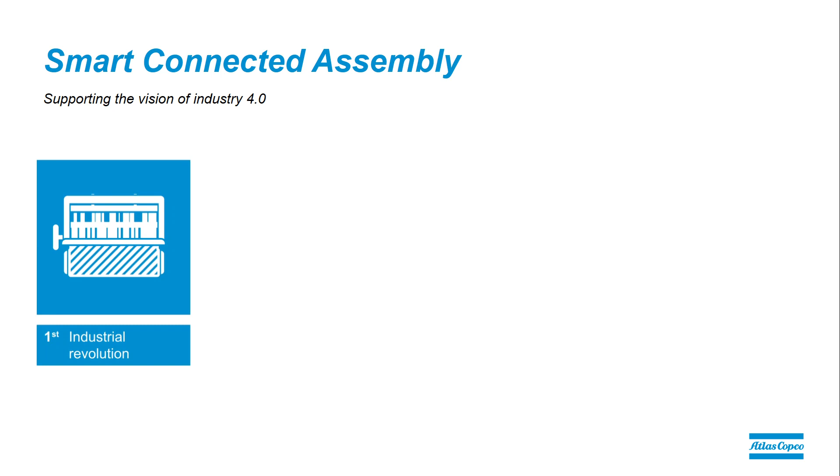Before we can go into any specific concepts, I think it's important to take a step back, because to understand where we are going, we need to understand where we are coming from. As many of you know, Industry 4.0 is a term representative of the fourth industrial revolution that has already begun, and we're seeing it now in its infancy stages. But how did we get here? How did we get to the fourth industrial revolution? Let's take a step back and look at the innovation through history that has been driving us to this point, starting with the very first industrial revolution that was marked by a shift from people making things as individuals inside their homes and in one-man shops to factories and mass production.

This utilized special purpose machinery powered by steam engines, and really enabled the second industrial revolution, which we're probably all most familiar with as we still live and breathe in assembly lines today. With this second industrial revolution came mass production, further enabled by the assembly line. The third industrial revolution took that assembly line and mass production and introduced electronics and IT to further automate production processes. This third industrial revolution is really where we've been since about the 1970s. And that brings us to our current state.

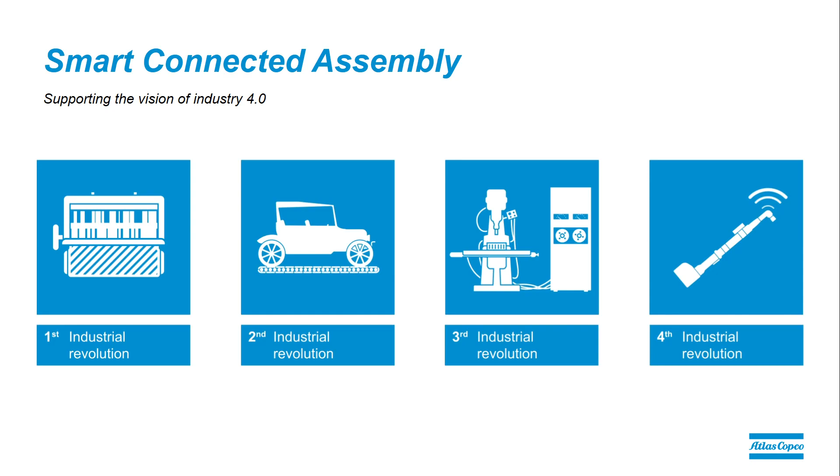When looking at smart or connected devices, Atlas Copco has more than a decade of experience delivering smart devices, and today we have more than 15,000 wireless tools in operation. With this, we have gained not only knowledge in how to design and produce smart devices with battery and wireless technology, but maybe even more important, we've gained the knowledge of what it takes to actually deploy this technology and get it up and running to meet our customers' production demands.

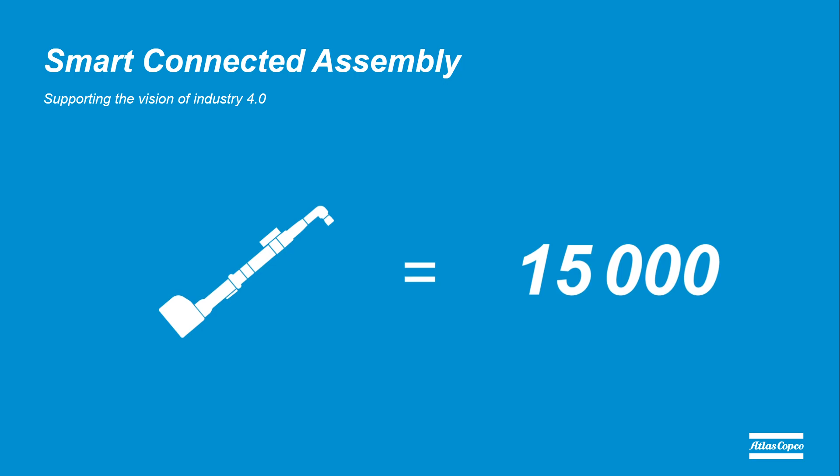Going one step further beyond connected devices and into the big data realm, we look at our 15 years of experience in data collection and analysis with over 60,000 connected devices, which has allowed us to gain insight not only in how to develop software for data collection with the right communication protocols, and then optimize the user interfaces, which is something we have done with our latest generation data collection software. This has also given us the knowledge to understand what it takes to maintain data over time with archiving and upgrades, and the analytical tools needed to really make sense of it all. So between our over 15,000 smart devices already in production today and our over 60,000 connected devices, we have a solid platform both in product and in knowledge base to stand on today, but also to build on for the future.

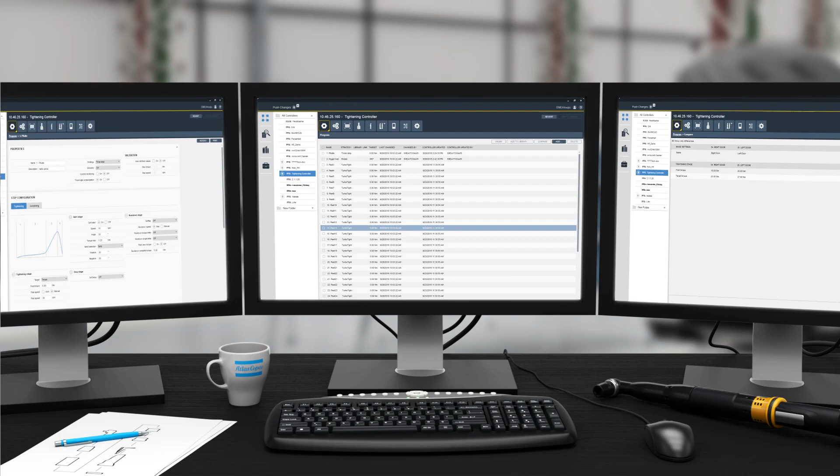From the configuration software now, let's go out to the plant floor level and take a look at this overview, where connectivity and real-time control of the assembly process is brought to life through our next generation tightening controller, the PowerFocus 6000.

This controller operates as a fog node, which essentially means that it allows for the connectivity and real-time control to happen closer to the physical proximity of the tightening.

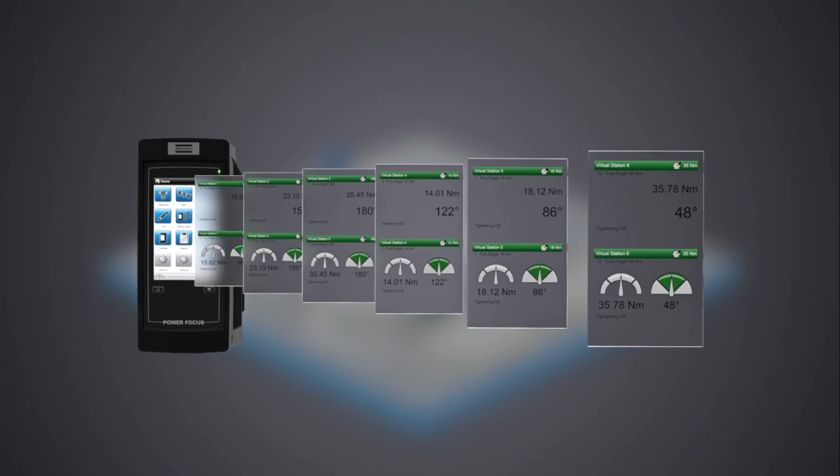In addition to that, this controller is capable of having multiple virtual stations. So instead of a hardware box running one-to-one tools throughout, a virtual station provides the necessary process control in the station. This concept of virtual station eliminates the need for hardware in each individual station. These new wireless stations can be added simply by adding new virtual stations onto existing control boxes.

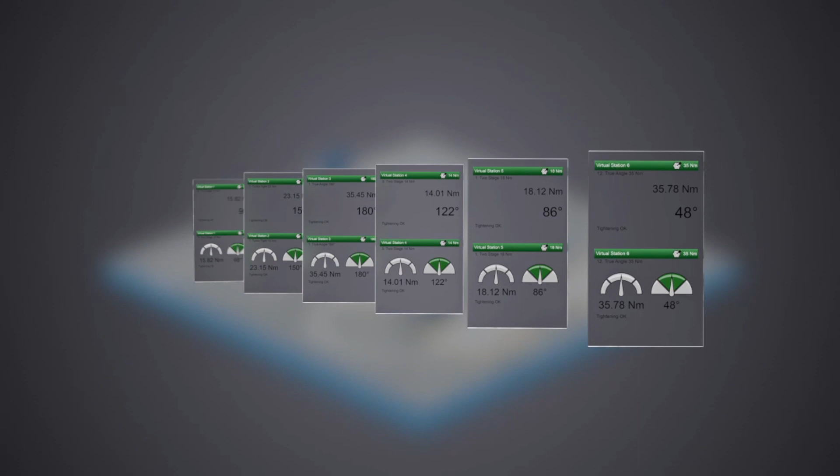What we're illustrating here is this virtual station concept now being brought down to the station. And when you show all the connectivity of the entire assembly line together, we see that we represent a change from value created by boxes and cables to now software and wireless smart devices, which is pivotal in supporting Industry 4.0 and is a cornerstone, like I said before, of our smart connected assembly.

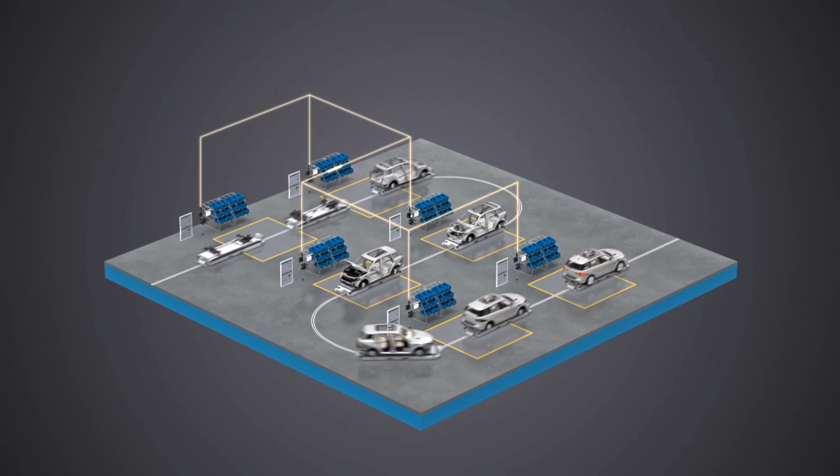What we're representing here with this graphic, you can see in the white lines going up from the stations and the lights moving around, it's symbolizing the data transfers that are happening. So the process control is happening at the individual virtual station level while the data is being pushed back up and being recorded at a traceable level.

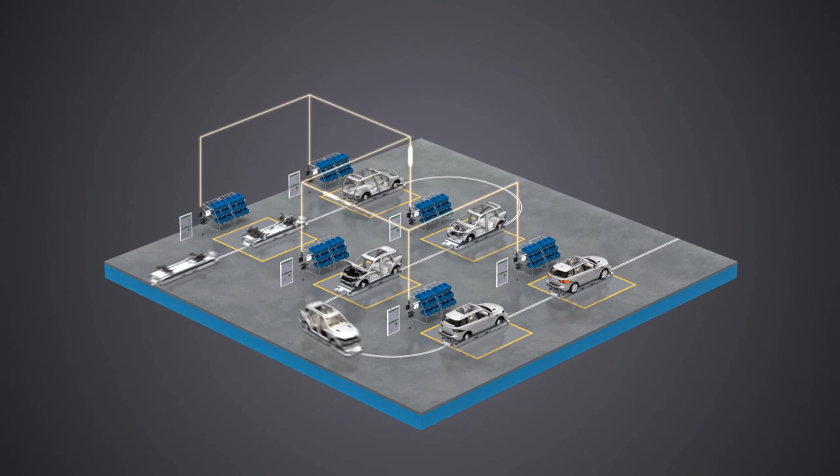Let's go now from the plant floor level that we were just at to a station view and explore how our products bring to life our 6 pillars of value.

Superior productivity has long been a value pillar of Atlas Copco. The PowerFocus 6000 is the latest generation of tightening controllers from Atlas Copco. With this new platform, we focus on various value pillars, but specific examples given here include new product introduction, reduction in energy, and human interaction.

With regards to new product introduction, the system's capability to add and move around virtual stations instead of physical boxes means faster, simpler, and less expensive rebalancing when our customers are introducing new products. And within that same regard comes...

Reduction in energy use. With the use of virtual stations, there's less energy used by the actual physical boxes consuming electrical energy. And then we move into human interaction.

The new interface on this controller has been designed really to assimilate to what most operators and users would be used to now with smartphones and tablets and things like that, to ease use and also make it more efficient as far as training and things of that nature go.

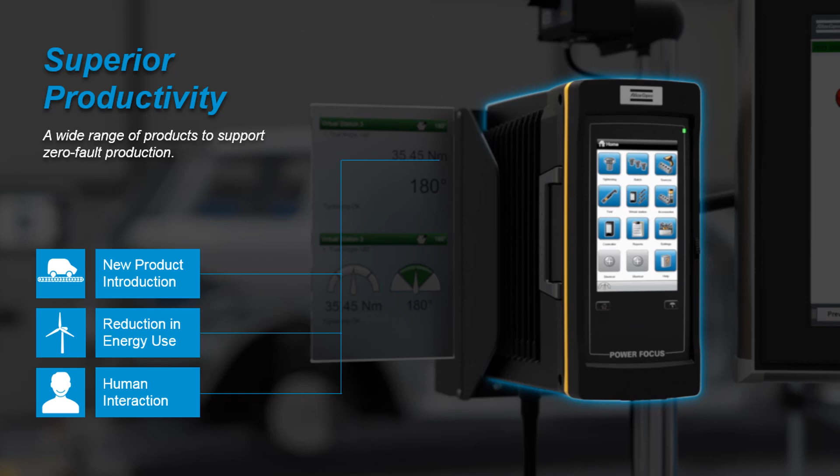Going now down to the tool level, we look at the Tensor STR series, which is our latest generation of corded transducerized tools. Some values that this tool is bringing now is with use of a physical sensor in the tool, we're able to introduce a new angle monitoring strategy called True Angle.

What this strategy is able to do is reduce common assembly problems by eliminating operator influence on the tightening and giving an actual true angle readout of what was applied to the joint specifically.

And if we look then now next to improve productivity, we've put a faster motor with better heat dissipation, which should reduce cycle times in most applications.

And then going into human interaction, another new strategy we've implemented with this tool is on the tightening side, and it's called Turbo Tight. What Turbo Tight does is it's an algorithm that is able to reduce reaction force and in some cases reduce the need for reaction arms altogether.

Other things that you see on the tool here is what we call an EHMI. Down at the bottom of the tool there towards the reverse ring, you see an indicator right there for the operator getting readout and feedback as to the results of the tightening. And then at the end of the tool are rotaction sockets, which are sleeved sockets to protect from injuries due to entanglement.

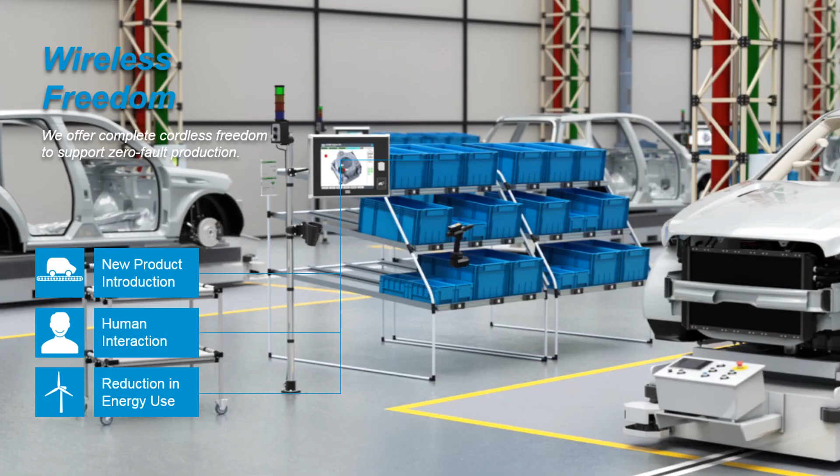Moving on to another technological trend, which is towards wireless devices, let's take a look at what we have to offer in this product range and talk about what values you can gain through wireless freedom.

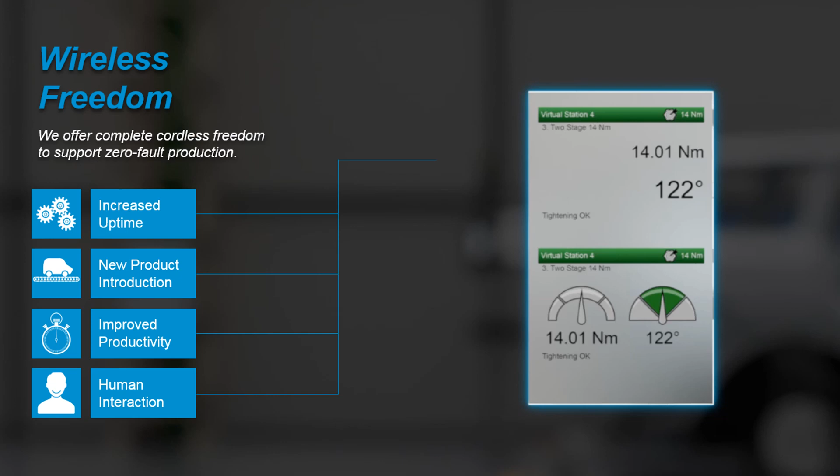We've touched on the virtual station capabilities of the new PowerFocus 6000 a couple of times already, and this here just reiterates that you can expect increased uptime, ease of introducing new products more quickly, improved productivity overall, and then an increase in human interaction with the systems through these virtual stations.

Going now to the actual battery tool themselves, our wireless battery tool range, the Tensor STB tool itself, brings value by increasing uptime, improving productivity, and helping customers introduce more products more quickly. And really it's doing so by being a battery tool itself.

So not having cable management to worry about, lending itself to more flexibility and accessibility for operators when actually using the tool, being more compact and low weight, maybe compared to fighting with a cable on a tool, things of that nature, really lend itself to these values when put in use.

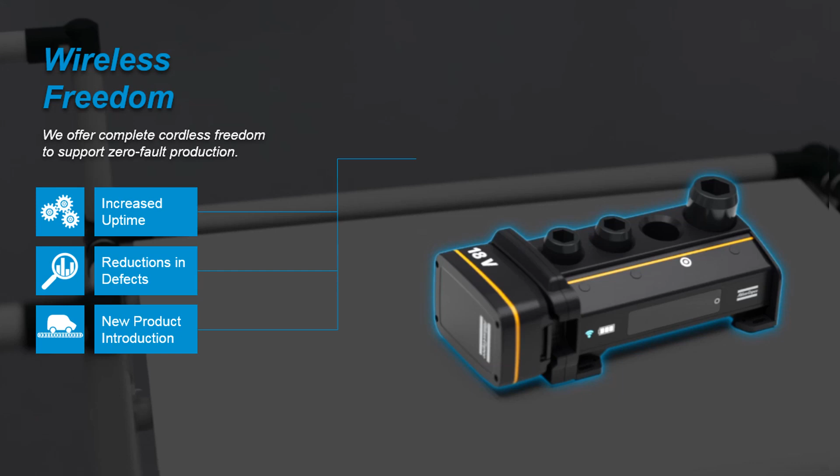And then, of course, reduction in defects. The purpose of the socket tray itself is to help guide the operators through the process and make sure they're doing the correct operations in the correct sequences.

And on that same note of reducing defects, we can now look at one of our error-proofing station solutions, what we call a single quality station. And what this solution really is looking to do is help increase uptime, reduce overall defects, make it easier to introduce new products, and give a better human interaction experience with the process in general.

When we talk about increasing uptime, one way this system can do so is by putting inline rework right within the screen, so that if a defect happens or something happens in the operation, the part doesn't have to be pulled offline and completely taken to a separate area. It can be done inline now.

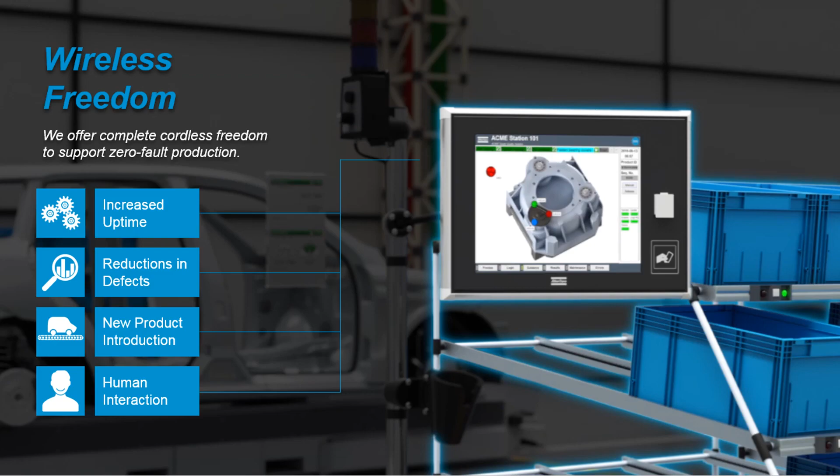Going beyond production, we offer a wide range of quality assurance equipment that also aligns with our 6 pillars of value, and we'll look at a couple of them here.

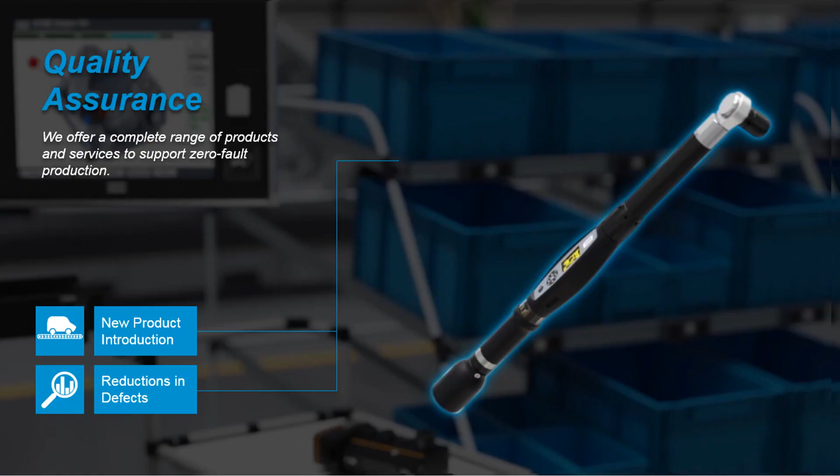Looking first at our ST wrench, our digital torque wrench. This is a modular and compact design for quality control to check residual torques, perform joint analysis, including joint behavior and joint stiffness. It's also great for prototype builds or low production volumes when accessibility is limited.

Going beyond quality assurance equipment just related to joint quality, we now look at machine capability, which can be tested with our ST bench quickly and easily under real production conditions without having to interfere with production.

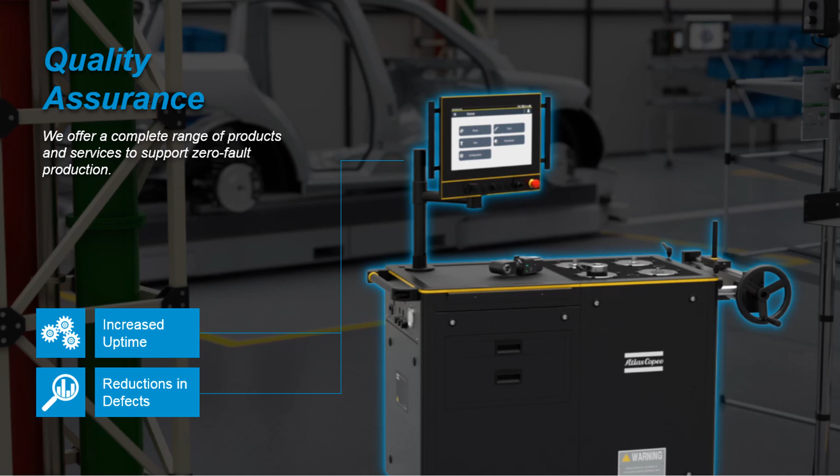Which brings all this to data collection. The output from all those connected devices we've talked about so far today is the newest raw material: data.

I've read some industry articles that are changing the adage from cash is king to data is king, or data is gold. Data historically has been used for traceability purposes, and while that's still very important, how we use this data to actively analyze and optimize our production systems in the future is really what takes data from being a raw material to a tangible asset like gold.

And in doing so, our customers will realize values like increased uptime, reduction in defects, new product introduction, and improved productivity and human interaction. Having proper data collection, and also being able to analyze it and get a quick output from what all this data means, is what will give you all those value drivers.

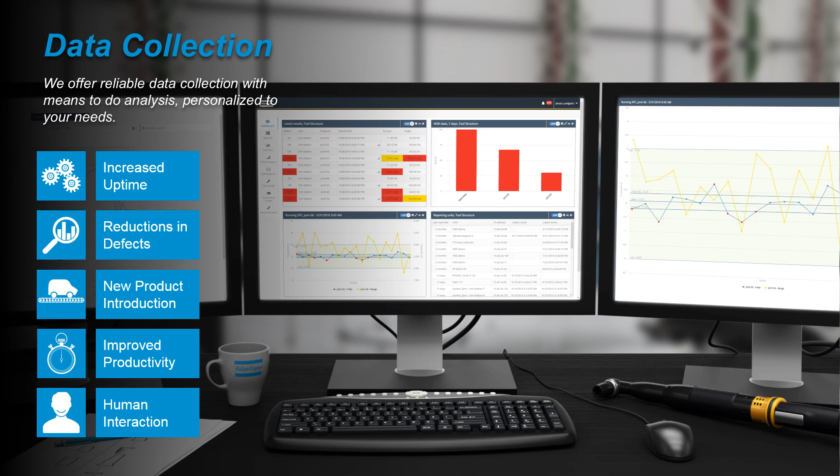And then finally, looking at service, because all of this equipment does us no good if it's not installed properly and kept running and optimized on a regular basis. So from a service perspective, we have a complete range of offerings that support smart connected assembly in these 6 pillars of value we've discussed today.

I'll start at the beginning with startup services. With this service, you can introduce new products more quickly with the help of our trained technicians, and you can ensure that you're optimizing throughput right off the bat while also minimizing potential defects that come off the line with the correct setups.

You then move into maintenance. Once the equipment is up and running, we need to make sure it's maintained properly. Asset utilization becomes key after startup. You have to ask yourself, how will you keep the plant running? Atlas Copco offers a full range of maintenance options available to help you increase uptimes through properly maintaining all of your equipment.

And then finally, moving into optimization. Once everything is started properly and has been maintained, we want to make sure it continues to run properly, but also optimize it to make it better than it was the day before. We offer a full range of services and solutions to help do this as well.

So we've gone through these 6 pillars of value with you a few times. We're focusing, based on what we know from industry trends, on increasing customer uptimes, helping our customers reduce their overall defects, allowing them to introduce new products more quickly, helping to improve overall productivity, ensuring that the human interaction with our equipment and our software is excellent, and then of course reducing overall energy use.

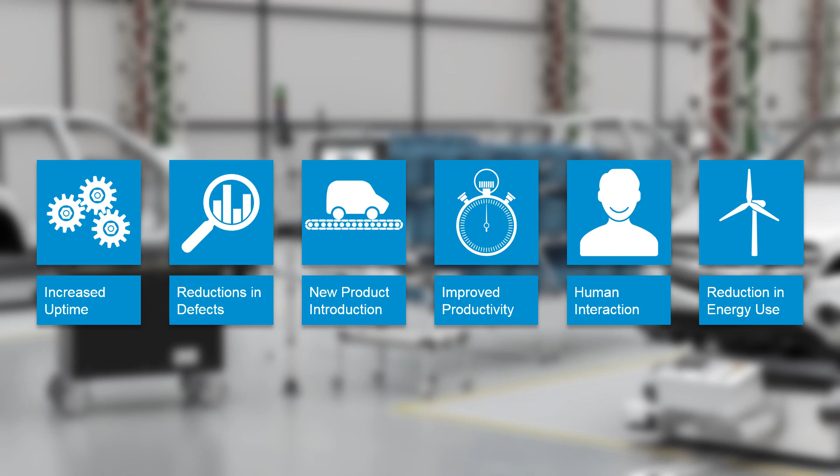And this is what we call Smart Connected Assembly.

Before we end, I want to leave you with a final thought, which I wish I could say was my own original thought, but it's actually inspired by a Microsoft commercial I saw during this year's Super Bowl. It's narrated by Common, in which he says, 'It's not about what technology can do, but what you can do with it. You're the voice, and it's the microphone.'

And at the end of the commercial, he asks, 'What will you do with it?' I think that's a really simple question, but at the same time, it's something that we're all working towards, as corporations and then individually as well, to understand what we will do with all this new technology available to us, and how we will use it to make our companies better. The journey to answering that question is something that Atlas Copco wants to be a part of. And I hope it was brought to life here with the presentation today with our Smart Connected Assembly concept. We look forward to working with you in the very near future.